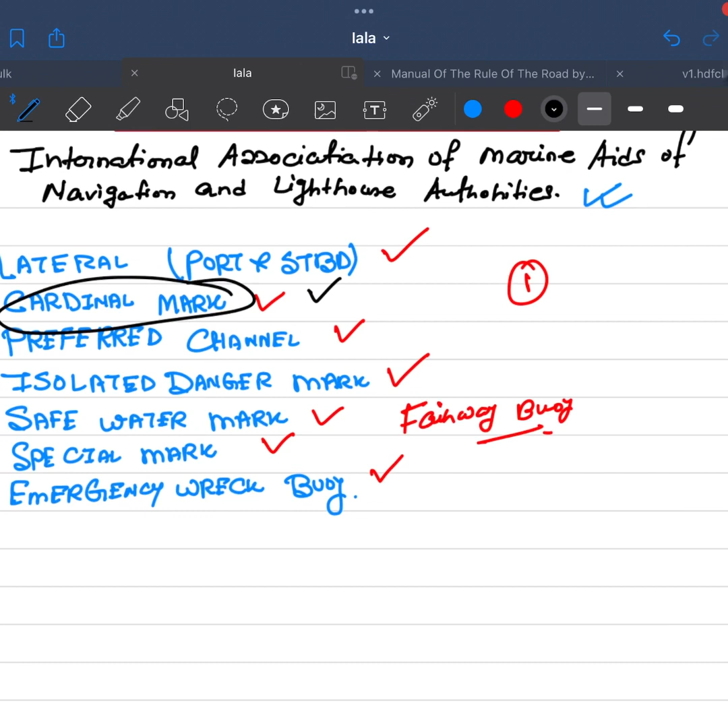So, as you have seen my last video, it was about the IALA buoyage system. I'll just give you a short recap. In the last video I covered the cardinal mark. If you have any doubt, you can go and check that video again. Okay. So today we'll cover the lateral mark and the preferred channel. These are small topics.

So today is Sunday. So on a lighter note, I will try to make you understand, not so difficult.

This is part 2 of this video, and in the next parts I will try to cover the isolated danger, safe water, special mark, and emergency wreck. So now let's start with the proceedings. First of all, please note this is the full form of IALA. Okay, again, a firm reminder. So now move to the topic.

Always remember there are two regions. They have divided the whole world into two regions. This is an MMD question: tell me the names of the countries included in region A. If the surveyor asks you, you can say that region A consists of Europe, Africa, Australia, some Asian countries, and apart from that, some Gulf countries. Region B is very easy: all of America, meaning North America, South America, Central America, Japan, Korea, and Philippines.

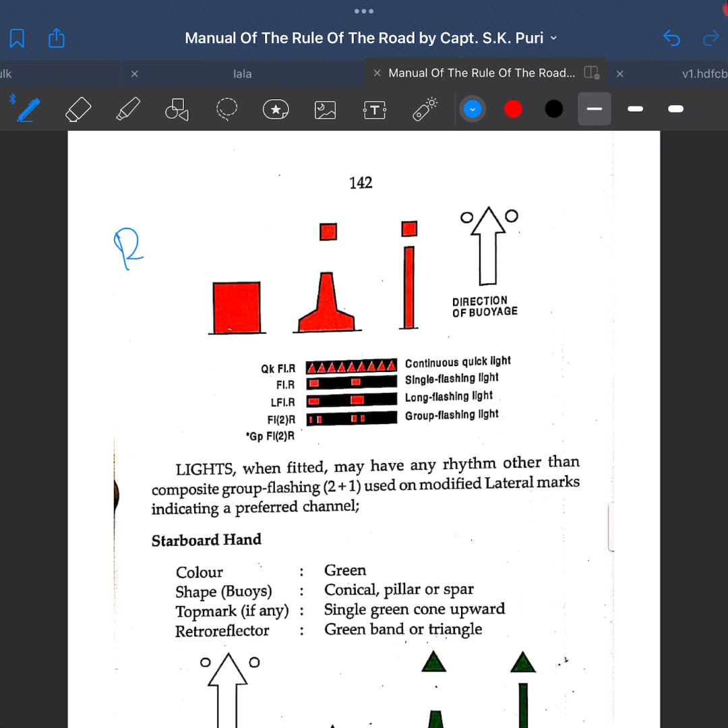Okay, region A. Now for port hand, the color will be red, the normal red. Shape cylinder, pillar or spar. Top mark single red cylinder or can, and retroreflector red band or square. So now this is region A. Always remember, if you see a cone for A, starboard. If you see a cylinder, then A, port. This is for region A.

Okay, so this is a can, or a cylinder. So cylinder or can, whatever, you can say that this is region A, red for port. Now lights will be other than composite group flashing 2+1. Now starboard, what I have told you, conical starboard for region A. This you can remember. And lights will be other than group flashing 2+1, because the preferred channel will be group flashing 2+1, so it will not conflict.

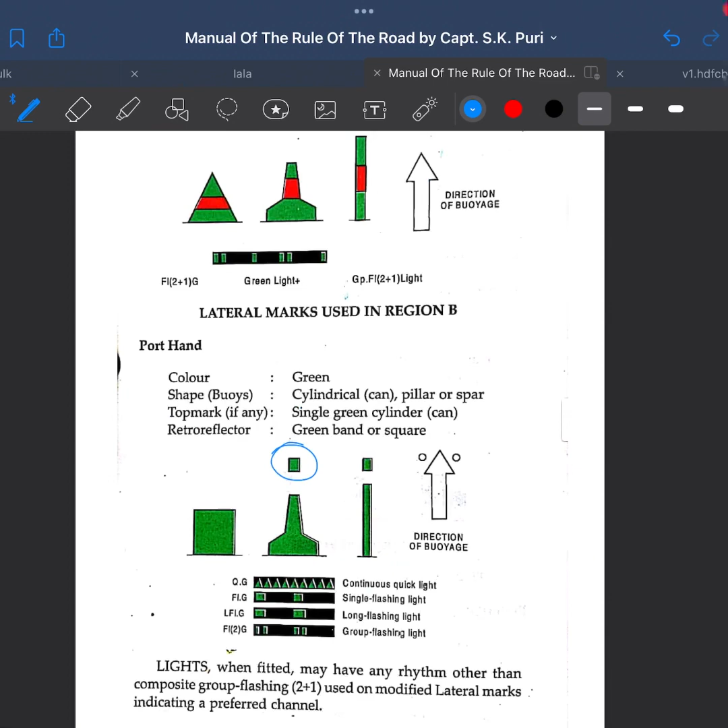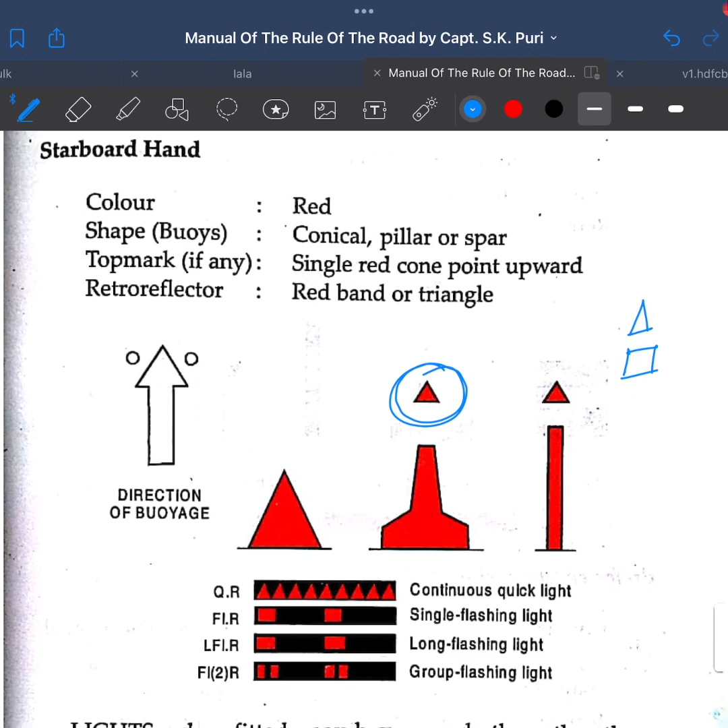Okay, now in region B, port hand will be a cylinder or can, green color. And for region B, starboard will be this. Always remember, starboard means your cone and port means your can. Right? Understood this thing? Now there are not many more things.

Now preferred channel. What is a preferred channel? Take an example, suppose this is a channel. The buoys are placed like that, and you are coming up like that. If it is a starboard preferred channel, you should alter to starboard. If it is port, then you should alter to port. This is nothing but an indication of which side you have to alter. So now how will you determine? Very easy.

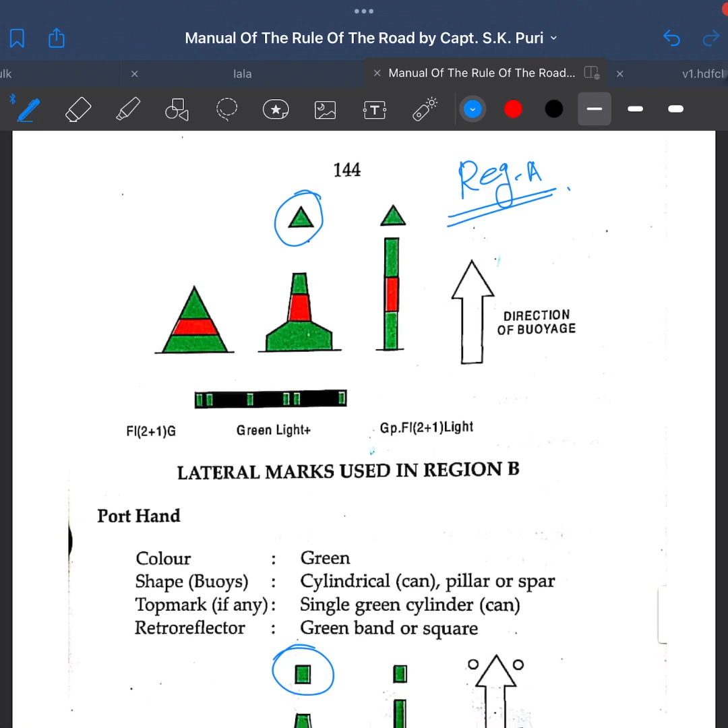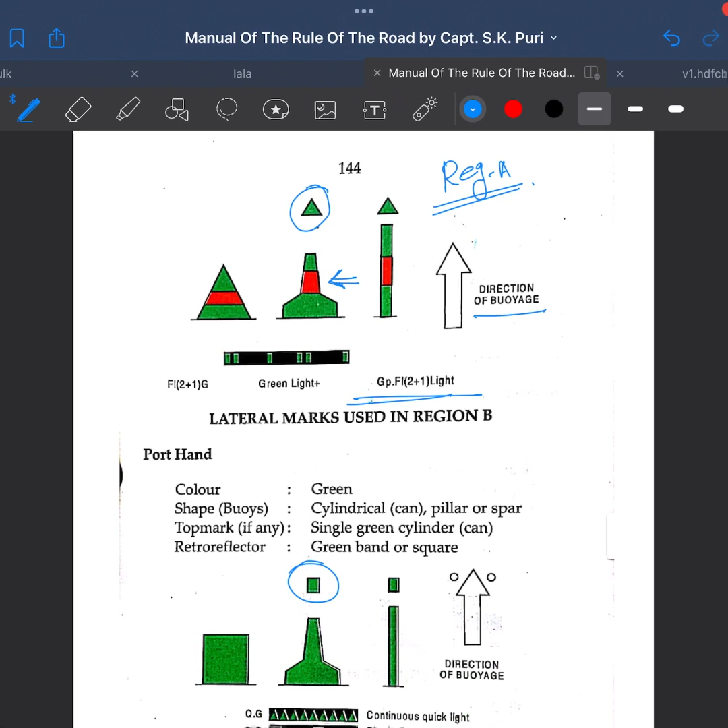Let's start with the starboard. If you see this thing, as I have already told you, this is region A. Now how will you determine which side you have to alter? You must check the middle color. Always remember, a preferred channel mark consists of two colors. It can be green with a red horizontal broad band, or red with a green horizontal broad band. This is how you determine it. See, this is the direction of buoyage. The light will be group flashing 2+1, always remember. Like that you have to determine.

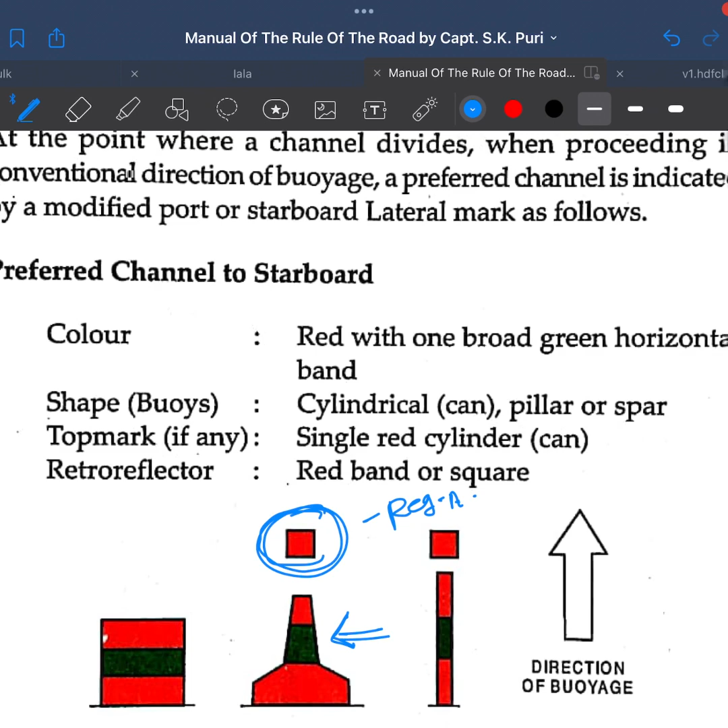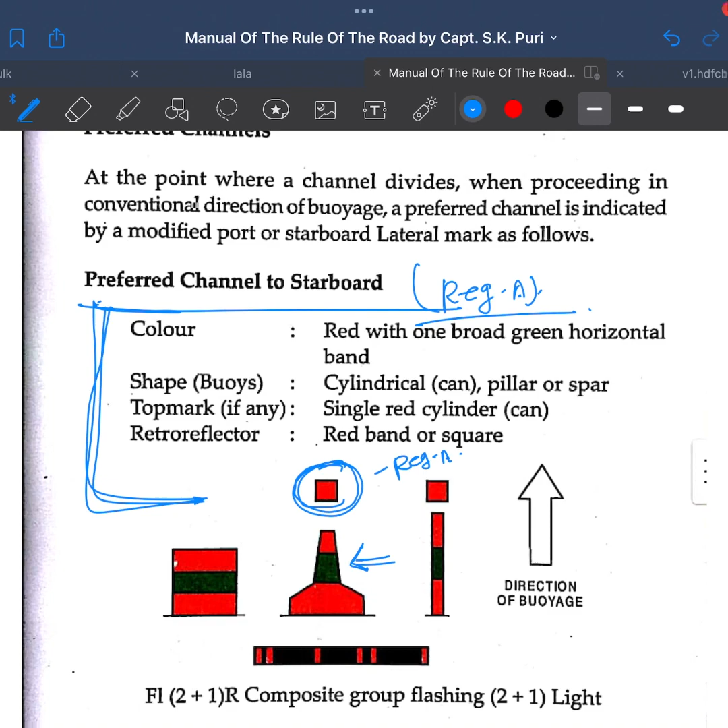If it was a port mark, then it will be like that. This shows it is a port, meaning this is region A, and it is showing that you have to alter course to starboard, preferred channel to starboard for region A. These things you can do by yourself. I don't want to discuss these now because I will show you a card later in this video, don't worry, and then we will discuss the MMD questions. Now for reference, this is region B, always opposite to region A.

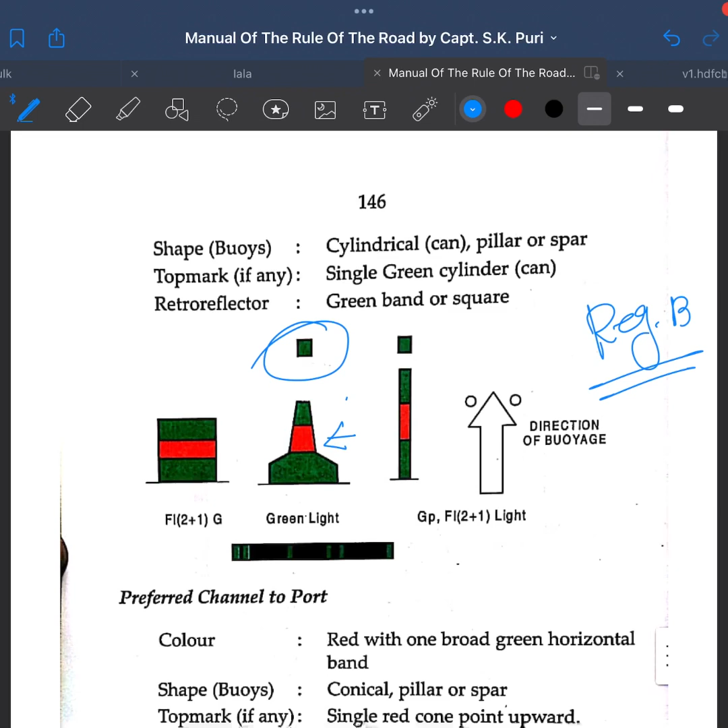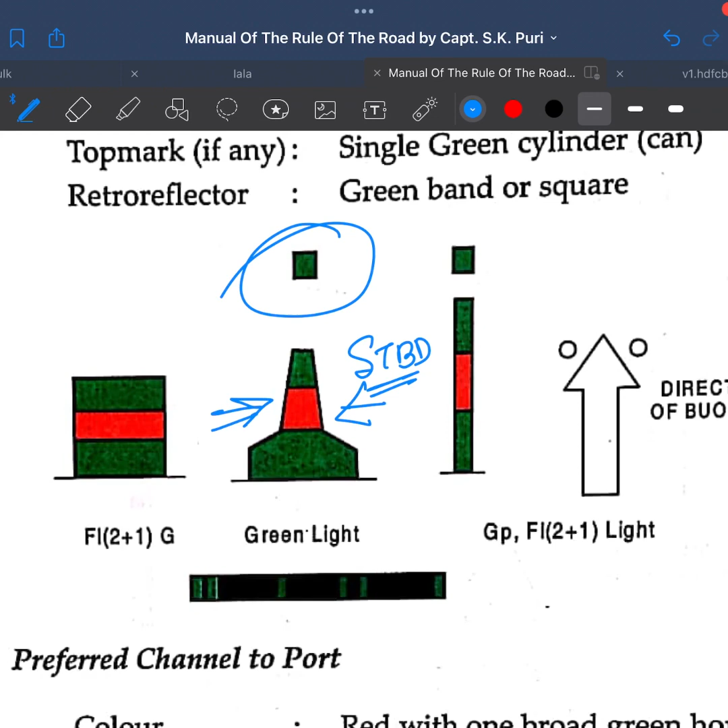So if you see the green cylinder, it means you are in region B, but red color will be starboard that time, not port, because you have to determine from the middle band. So now in this scenario, if it is region B, if it is green, then it is to the port, and if it is red, then it is to the starboard. So that is the difference.

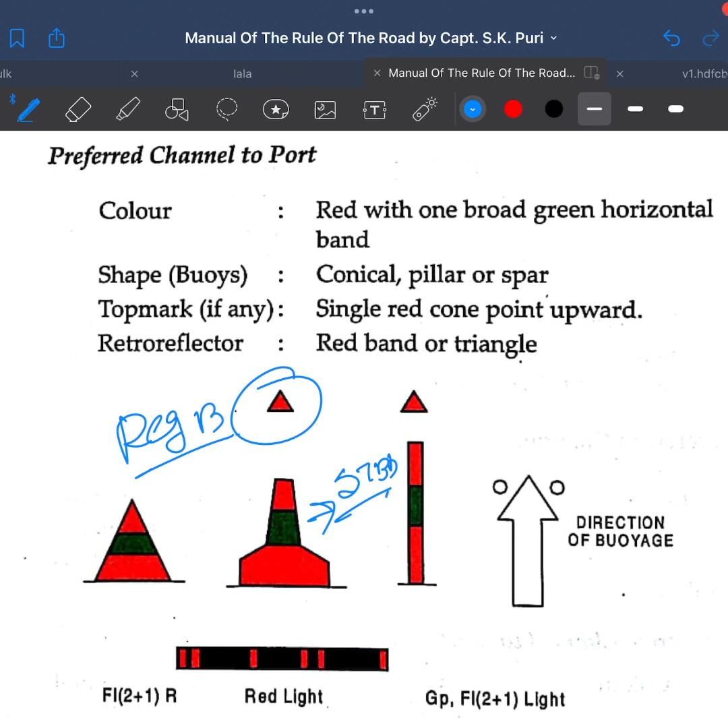See, now you can see this thing, you are in region B, this one will be starboard. So hopefully you have understood. I don't want to complicate those things. If you watch this video and read by yourself, I think you can easily get these things. Group flashing 2 plus 1 for lights, if fitted.

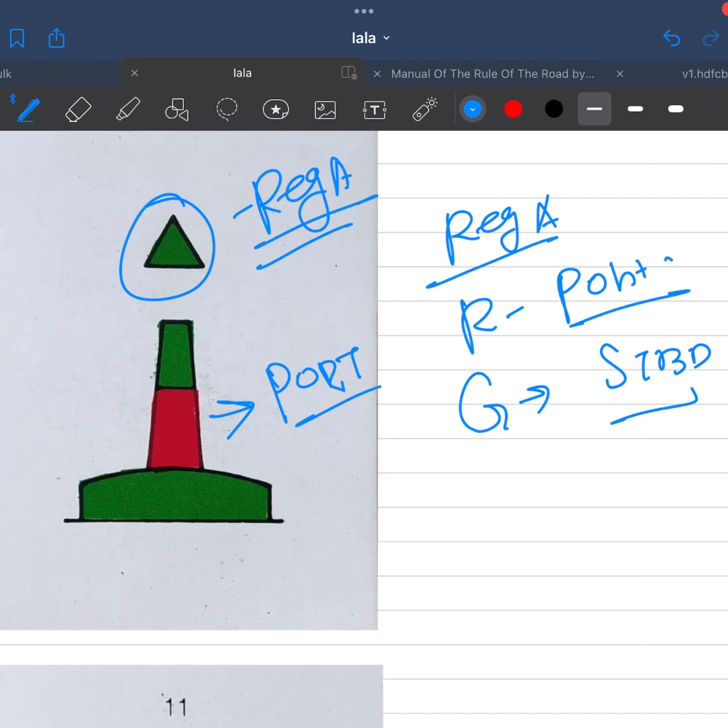Now MMD questions, and one card I will show you and finish it up. This is a card. So this is region A. If region A, red means always port, and green always starboard. Remember this. So what I have told you, go for the middle color. So if this is the thing, then it is a normal port, region A port. See, region A preferred channel to port.

Now you have to cover these 4 things. Green with one horizontal red band. Now you have to say the top mark, single green cone, point upward, light when fitted green. This will be the light. If it is red, then it is a red light. You have to determine which is the light from the top mark. Now composite group flashing is the rhythm. So that is how you have to cover these 4 things.

Now we'll move to the MMD questions. So MMD questions are simple. First thing, they might tell you the preferred channel to starboard, region A. Tell me the specs. So you have to tell the specs. Simple. Second question might come with cards. And this is not only for preferred channel, the lateral mark also. Lateral mark, simple, just tell me the specification. Then you have to cover those 4 points: shape, top mark, light, rhythm.

Now, card, simply they will show you and you have to tell again those 4 specifications from the card. Easy, right? Or they might say tell me the light, rhythm. If you know the full things, then short questions will be easier for you. Now, which part is difficult? Not difficult basically, but still. Suppose they might ask you region A, you are entering a port, which side will you see the green buoy? So, region, always remember, just 1 minute, let me change the.